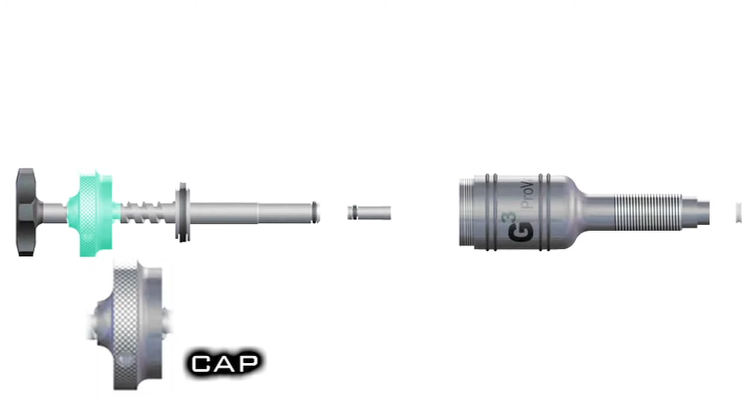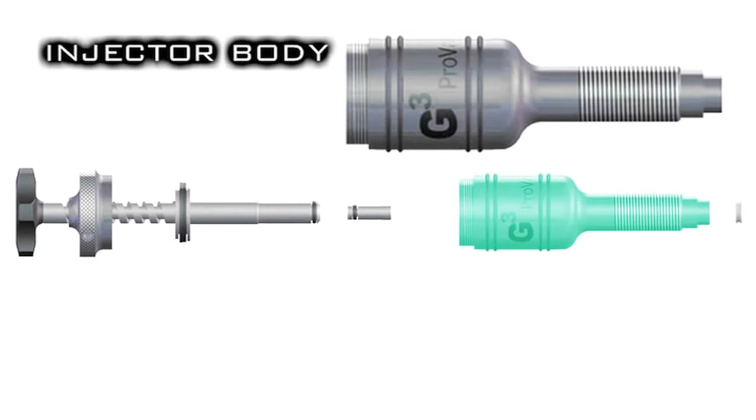The piston is the main performer in creating and maintaining a vacuum and injecting resin into damage. The resin piston itself is used to assist in injecting resin into the damage, and it keeps the resin isolated from contaminants. The injector body is where the vacuum is created and maintained.

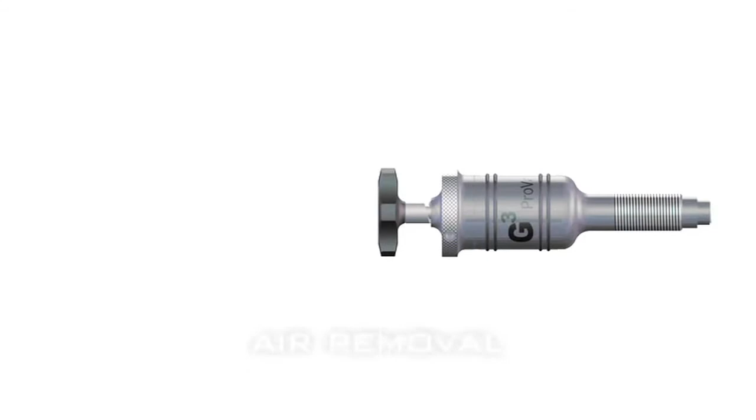All of these parts come together to form the G3 ProVac. A fundamental function of the G3 is its ability to remove the air from damage. Let's see how this works.

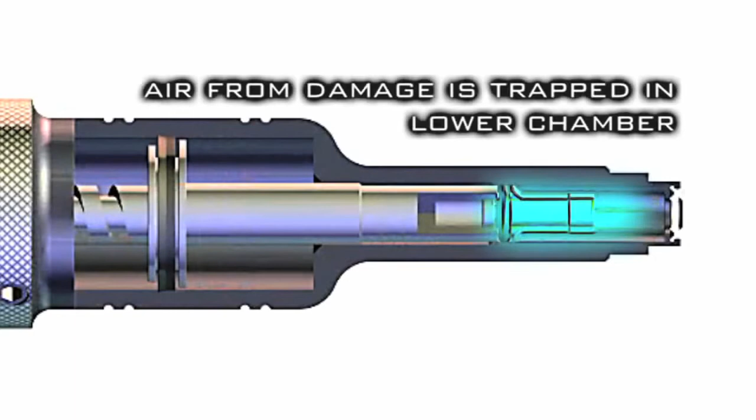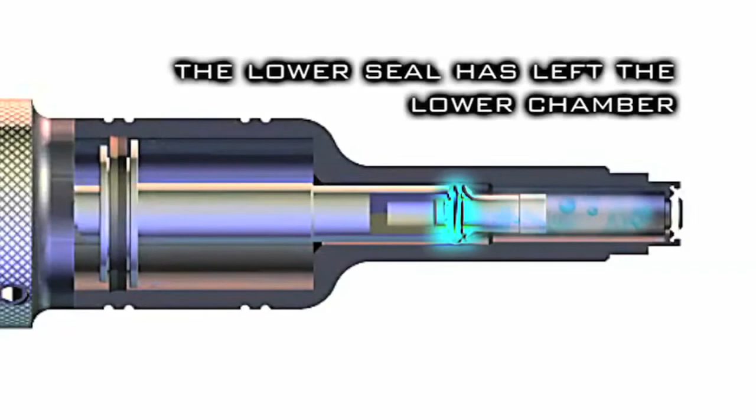As the piston moves up and away from the glass, a strong vacuum is created that pulls air out of the damage and into the injector body. When the lower piston seal disengages from the lower chamber, the air can then bypass this seal and move into the upper chamber of the body.

As the injector moves into its pressure cycle and the lower seal re-enters the lower chamber, you might think that the upper seal will push the air back down towards the lower piston seal. This does not happen because the upper seal is collapsible. The top edge of the upper seal collapses inward, which allows the air to push past it and remain in the upper chamber.

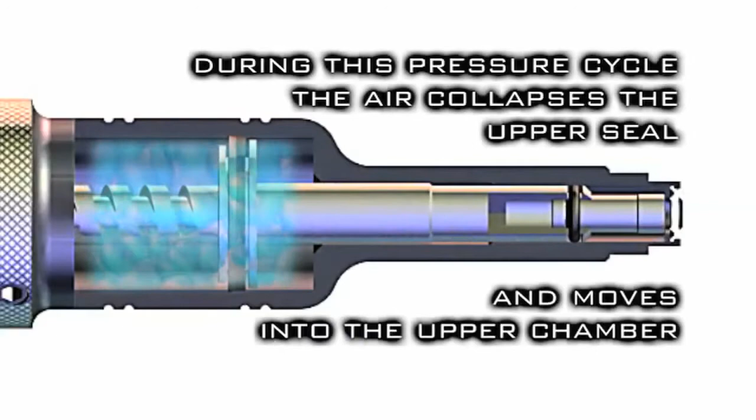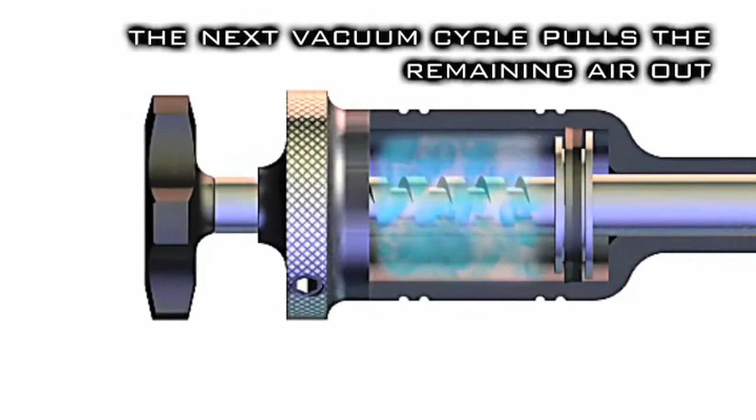Then on the next vacuum cycle, the air is pushed out of the injector body since it cannot pass the one-way collapsible seal. The air moves past the cap and through the piston threads to evacuate the injector.

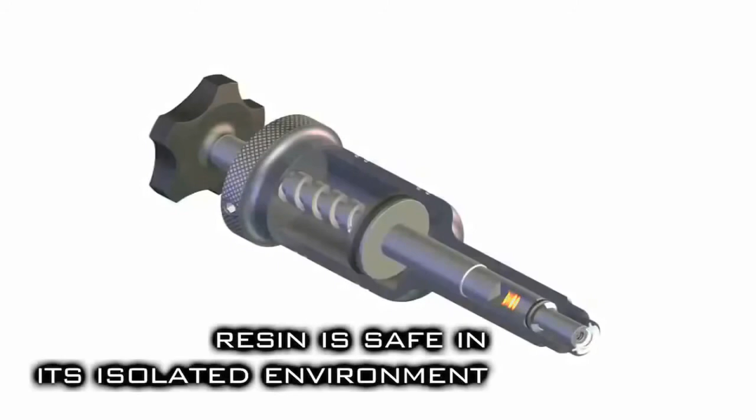The unique design of the G3 also allows for resin isolation. What does this mean? In this cutout, notice that the amber resin is in the resin chamber. Notice that as the vacuum cycle occurs, the resin stays in this chamber. Any air that is pulled from the damage moves around this resin chamber.

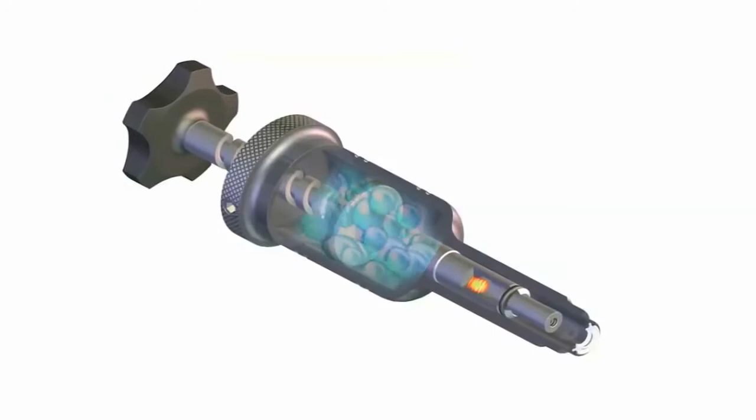Since the air and moisture from the damage did not come in contact with the resin, which is safe in its isolated environment, contaminant-free resin is then injected into the damage.

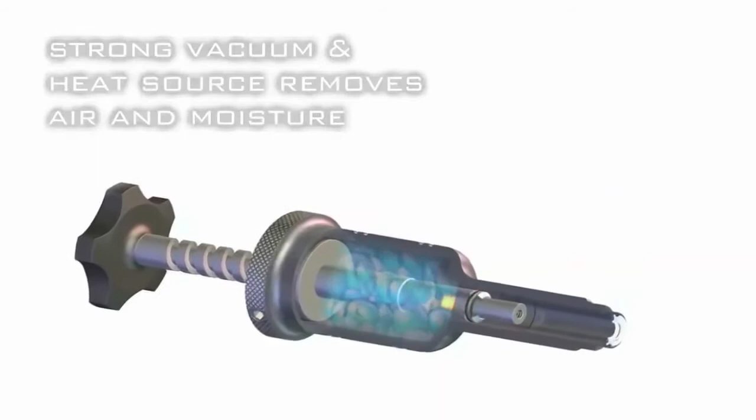But why is a strong vacuum and resin isolation an advantage to the technician? A strong vacuum will allow the complete removal of air, and in conjunction with a heat source, a vacuum allows moisture to quickly evaporate from the damage and move into the upper chamber.

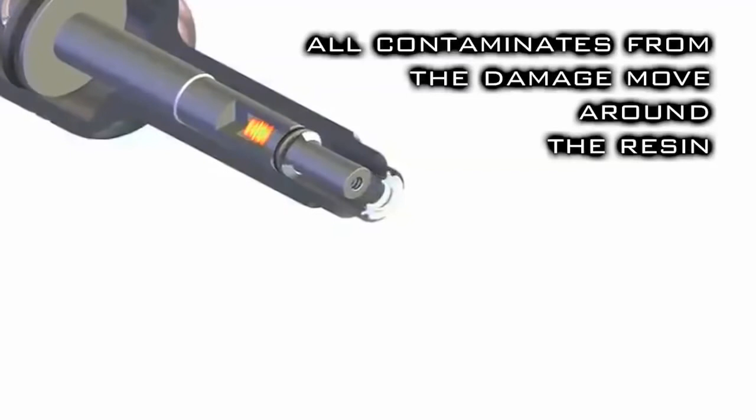This allows for resin to be injected into a relatively pristine damage that will repair with more strength and less visibility. And since you've gone to the trouble of making the damage as contaminant-free as possible, resin isolation allows for the resin to remain contaminant-free.

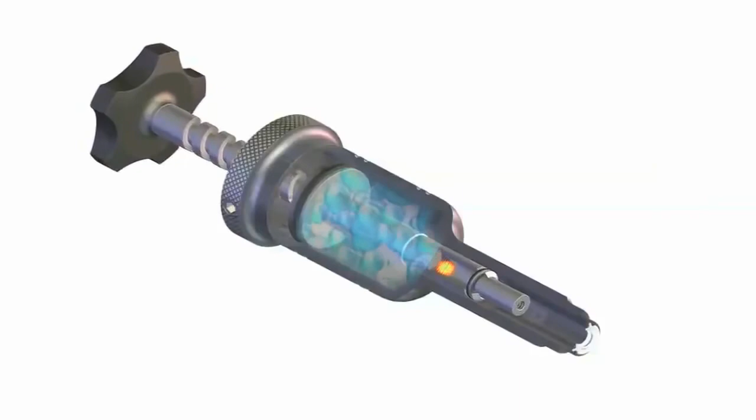Instead of moving all of the contamination from the damage through the resin, resin isolation means that these contaminants move around the resin, allowing for clean resin to be introduced into the damage. This means a stronger and less visible repair.

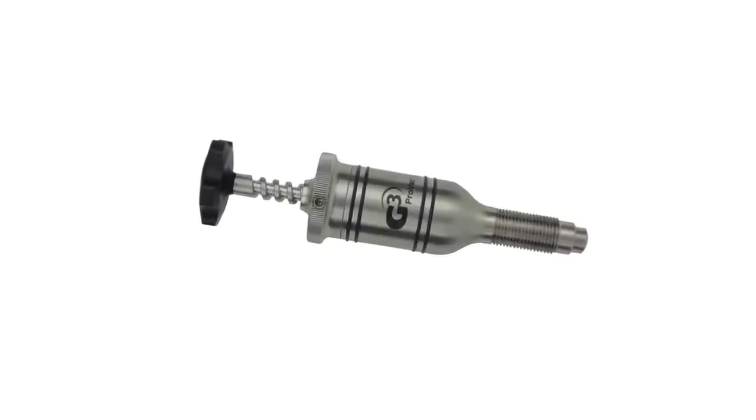The strong vacuum along with the resin isolation makes the ProVac G3 injector completely unique.